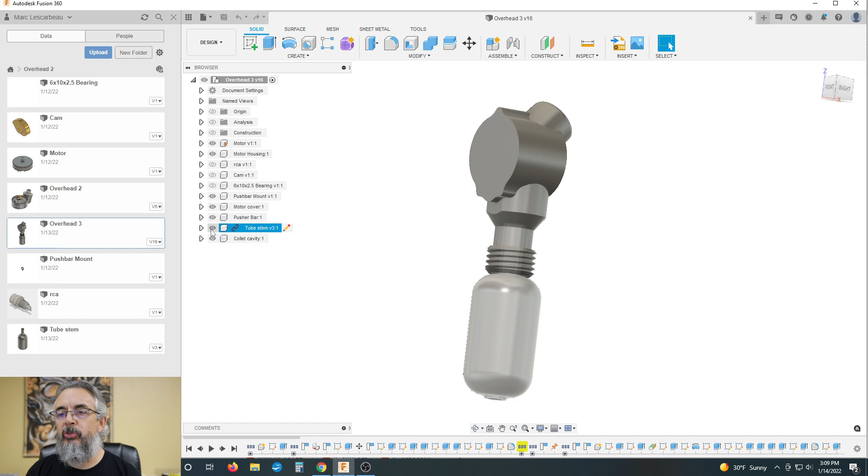Basically, there's a couple things I want to do first. I want to make a couple little changes, and that is mainly because I was downstairs looking through the tooling I already have, and I have a great 7-degree angled or tapered end mill. So I think we had built our collet taper here for 12 degrees, which would require a 6-degree tapered end mill. I already have a 7-degree, so let's go backwards and see what we can do to change that up and make life a little easier.

And what is going on here? Why is our... I haven't been in here since the last time we played, so I'm not sure. Okay, no, that's the collet there. Okay, so let's go back to this shape, which comes from this combined function. That's that. There's our sketch. Okay, this is how easy this should be, but I could be so wrong.

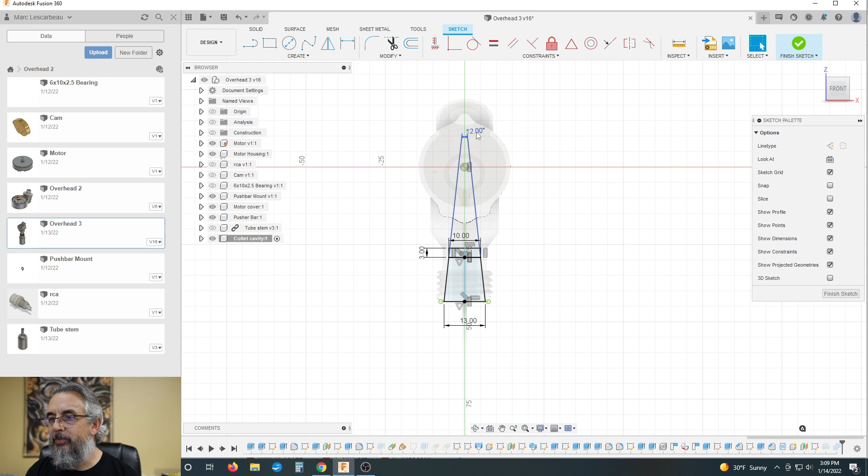Let's see if we go to 14. Okay, that just made it a little shorter. Not a big deal. And, all right. See what it looks like underneath. Pretty perfect. The only other thing I would do that I was thinking about was to recess this lip because, well, let me show you before I do it and why I'm doing it. Turn on the section analysis here.

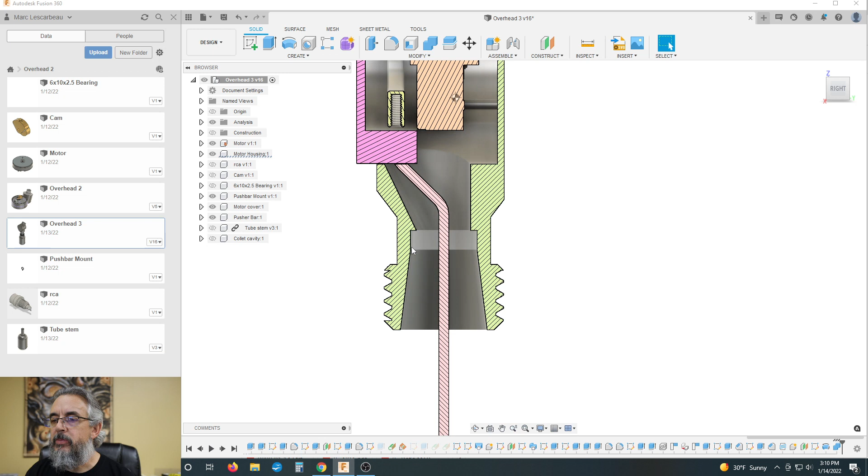Okay, so if you picture the wedge here as the collet nut that threads on the outside here, pushes the collet upwards. It pinches this taper in, which gives you the friction that holds the tube in place. And now the way I'm going to build this collet or flexure or whatever you want to call it is the very top is just going to be a solid ring all the way around with the 8mm bore and the OD that fits in here.

And then I'm going to slot from this line down either 4 slots or 6 slots. I'm not sure which yet. And there's going to be a just straight cylindrical part on the back of the collet that's going to pocket into here. But if it pockets in here and it seats against this lip, then the collet itself can't move upwards at all. And if it can't move upwards, it can't compress inwards. So I want this dimension to be a little deeper than the actual collet's going to be.

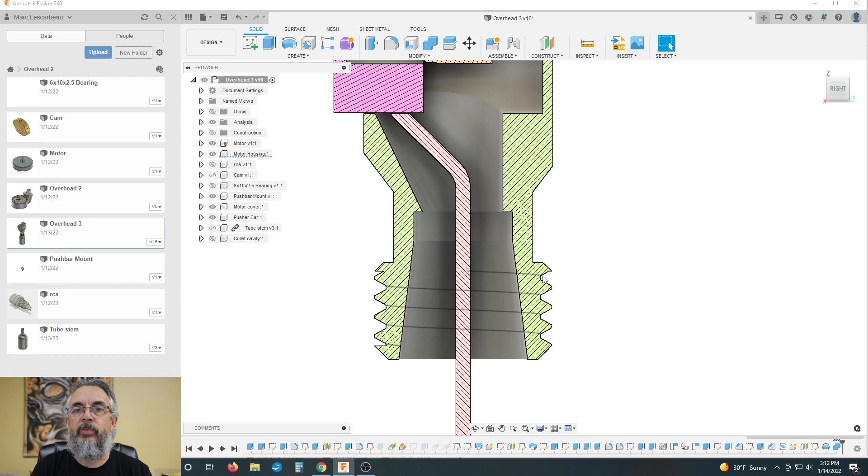And the reason I'm leaving this ring on the end is for a couple of reasons. Traditionally, when collets are made, they are slotted from one direction from the face up, and then in the opposite direction they're slotted from the rear back. So it creates this sort of zigzag all the way around the full circumference of the collet, and it gives it its springiness. I don't want to have to slot this from 2 different directions, and it would be quite a lot of work to do that. I have to create fixtures and whatnot.

So if I can find a way to produce this on my lathe where I have a solid piece that it can be held by during the slotting function and then cut off and still all be one unit, it should be more than adequate. We'll test some before we stick some out there for artists to use.

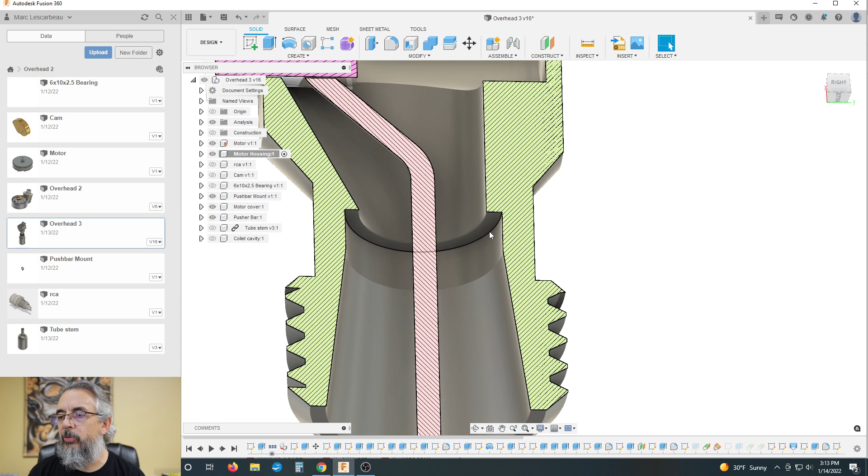But anyways, that is what I'm doing here, and this is going to be a matter of just simply grabbing this face, let's make sure we're in the motor housing. That's where we're working. I'm going to grab this face and I'm going to extrude that -1 millimeter. That's all I'm going to do is push that cut upwards. So now if I turn the collet cavity back on, which is what I'm going to use as the final shape for the collet itself, now you can see that there's room for the collet to slide up a little farther before it hits this shelf, and that will allow for compression and the holding of the tube.

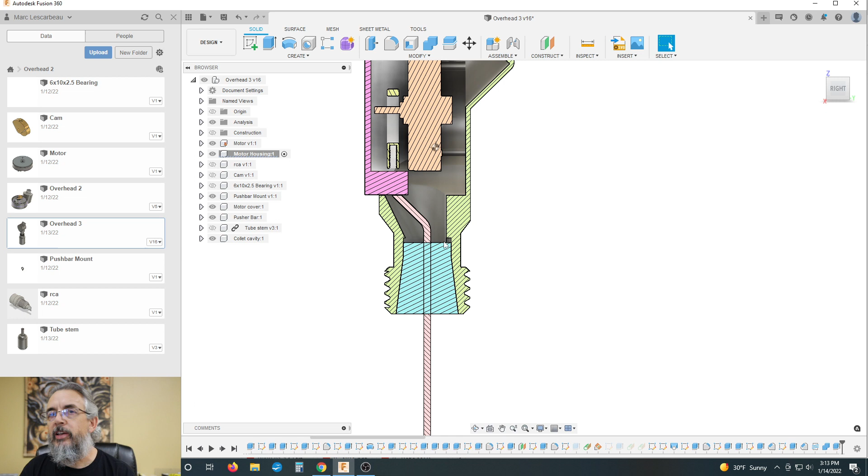So, these are just little things when you're designing something, you're going to come across all these little things, and you got to sort of stop and chase them down while you're thinking about them, or make a physical note so you get back to them. But I find when I'm doing this there's no better time than the present to just fix the problem. So heading off a future issue by doing that.

Okay, so let's do this. I'm going to, I want to keep that original. So let's just duplicate that part. A duplicate feature? Nah, just a copy paste, right? Okay. Oops. And I thought Control D was a duplicate before, but it isn't. Maybe they changed the software.

All right. You know what? We'll do this. We will save as, and we saved as a component. We're just going to call it, oh, sure, overhead 3 collet, and we're going to save it in overhead 2 file. It's going to show up over here. Okay, so now that's a totally separate product, actually.

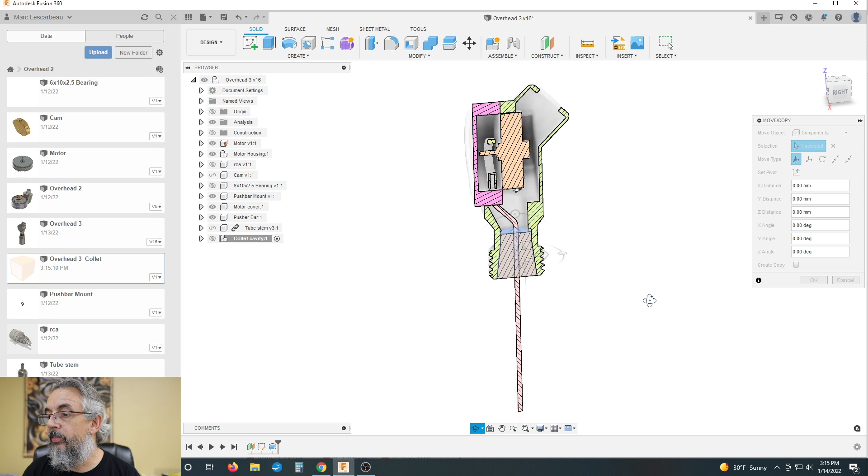So what we're going to do is we're going to insert this into here. We're going to turn off collet cavity, and let's see, that's in the exact placement we want. Perfect, done deal. Okay, so, oh, I inserted that into the collet cavity. So let's just drag that up to the top, and let's break that link. No, it's not going to let me break the link.

I get frustrated because it doesn't want to tell me why I can't break the link. Selected instance has some essential dependent instances. Breaking link parent is not supported, blah, blah, blah. Okay, I don't care. It's a separate product. Okay.

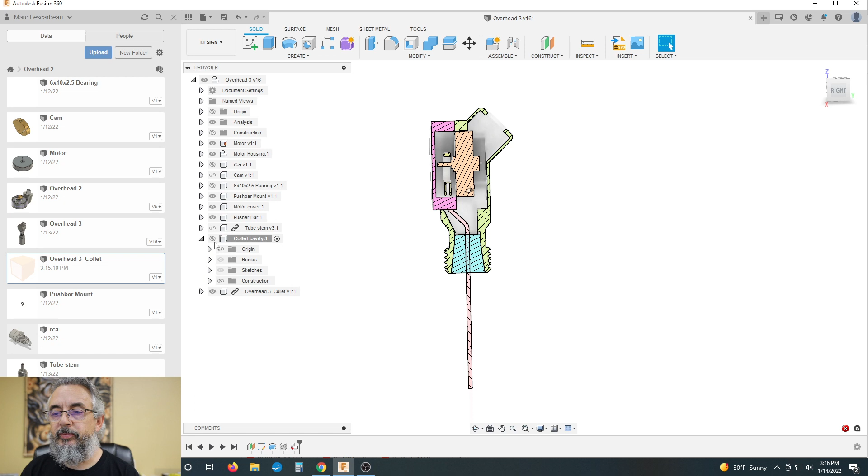Let's just isolate this. This is what our collet will look like. We'll turn our analysis off. And come on. Edit in place. Okay, yes. All right, so we're actually physically editing this part. Instead of opening it up separately, we're just going to open it up inside this project. So all we're really looking to do here, well,

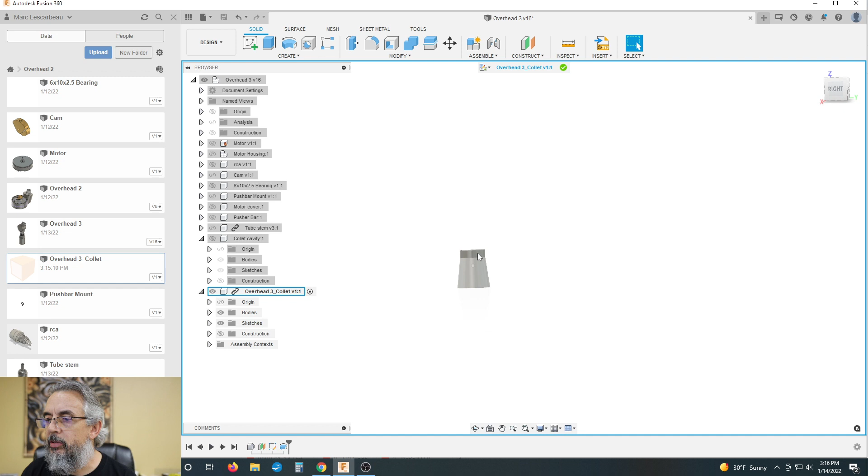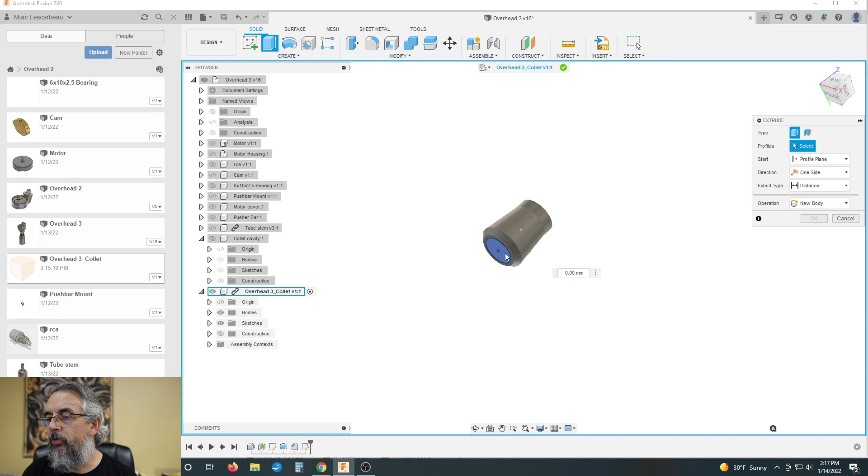a couple things. First of all, I'm going to put a chamfer on the front edge. Let's see, here, and let's do 1 millimeter, 1.5 millimeter on the front there. Then we're going to sketch on the face, and we're going to create the tube hole, which is 8 millimeters. Okay, let's finish that, and let's just extrude this all the way through.

Okay, so this is the basic shape of our pinch collet, and let's see, at the same time, let's open that sketch we just had, and let's see, rectangle, center rectangle. We're going to do a center rectangle here. I believe the thinnest slotting saw I have downstairs, I think, is a 32nd of an inch.

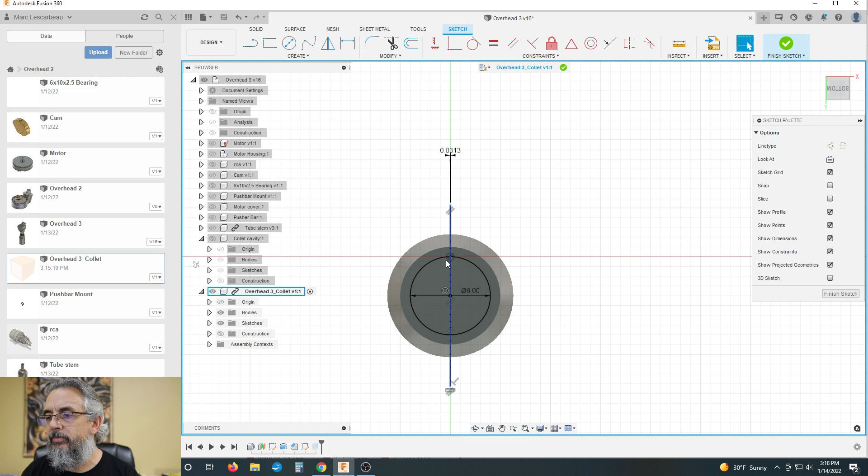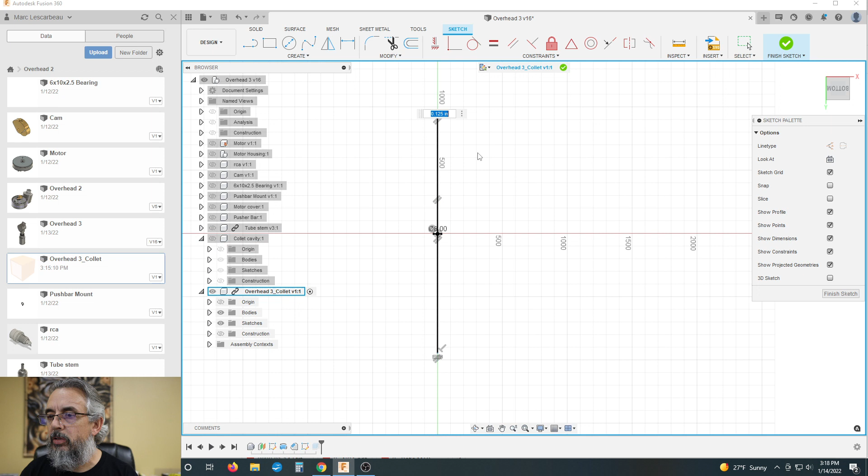So this is what's cool too, is the CAD software is smart enough where I can physically just go 1 divided by 32 IN. It knows how thick that is. No, it doesn't. Yeah, 0.03125. All right, so very, very, very thin slice there. Maybe too thin. Let's go 1/8 inch. So 0.125 inch. That's way too thick. Wow. 0.0625. I know I have a 16th inch slotting saw. Why is it making that so darn tall?

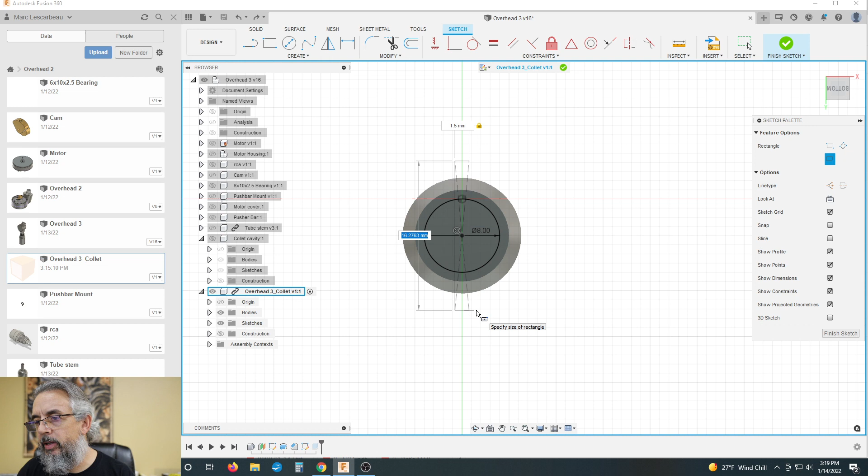All right. Let's do it in metric because it's just not registering properly there. Okay, so center rectangle again. Let's do this. We're going to go 1.5 millimeter by 16. And then we're going to do the same thing in the opposite direction. Oh, forgot to grab a center rectangle. Okay, 16 by 1.5. There we go.

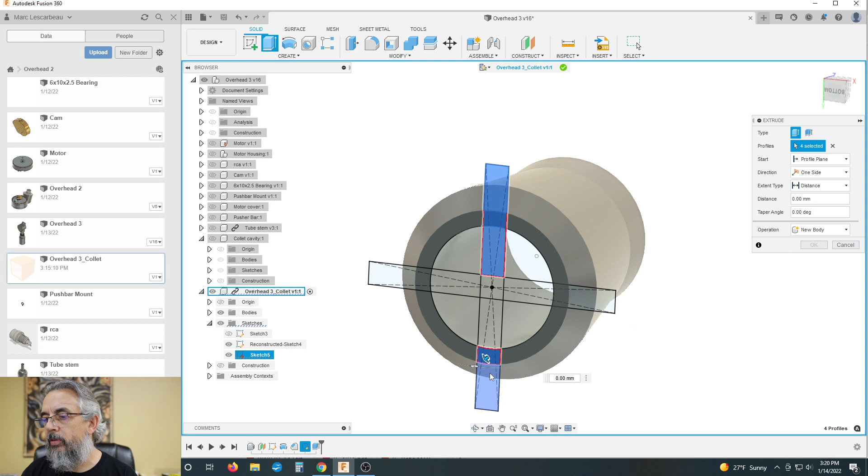Finish sketch and turn that sketch back on. We're going to do another extrusion, which is going to be everything within the rectangles. Why not? We'll grab them all just in case we modify the file later. Okay, and we're going to go to an object, back to, is it going to let me grab that scene? Nope. All right, so let's go distance.

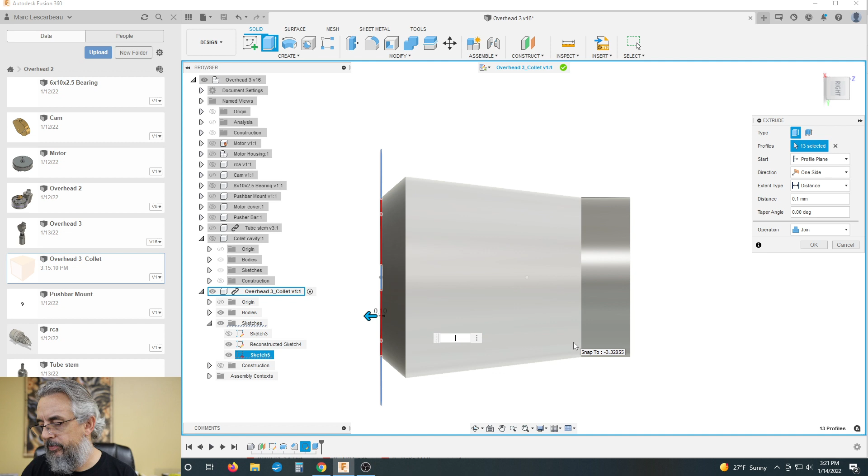Look at it from the side, and what is that? 12. Why is 12.1? I just want to get as close to this line as I can. So 2.5, good enough for government work. 2 is probably perfect, close enough. All right. So turn off that sketch now. Okay, so that's what our pinch collet will look like.

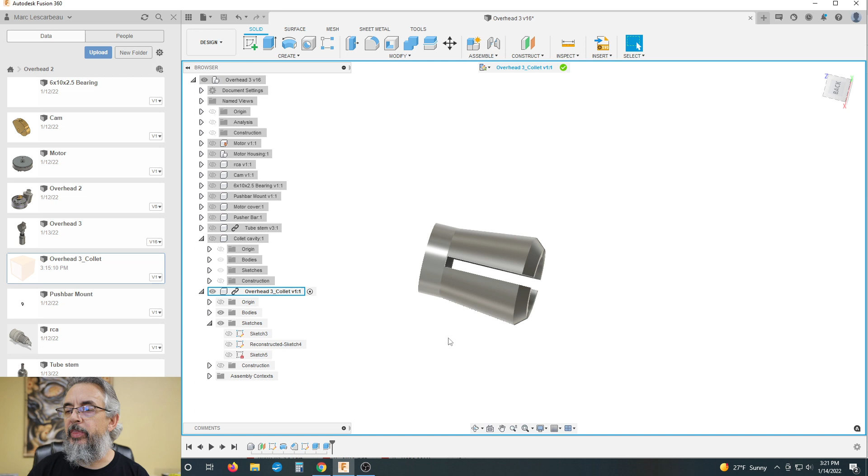And I can get that right off of the lathe all one shot because I've got radial tools. So the lathe will turn the outside shape, bore the hole all the way through and out, and then radial tool will come in and cut this slot, rotate it 90 degrees, cut the other slot, and then the cutoff tool will cut it right off of a complete part, one operation off the lathe. I will produce these originally.

I think I'm going to try them in the aluminum, see how that works, because it'll be a springier material. I may make some out of Delrin too, just to see. The Delrin won't have as much springiness, but it might conform and get a little more grip on the tube, and it may be easier to get out if one happened to get wedged in there.

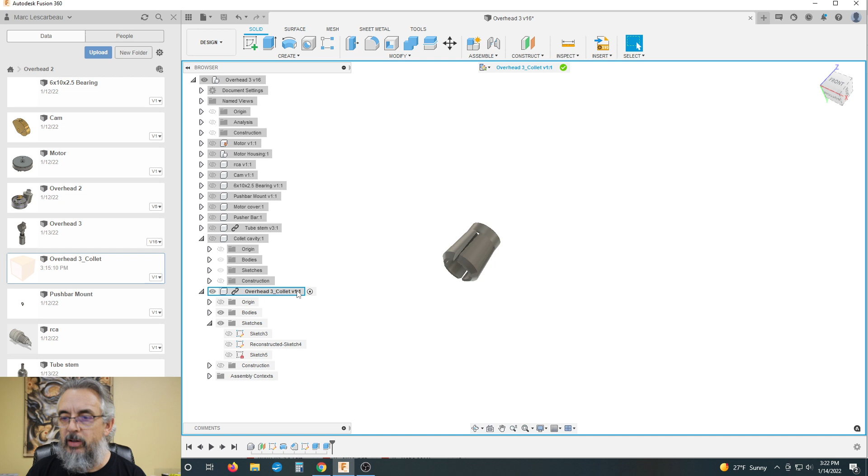So, all right, so let's exit our edit in place. There we go. And let's isolate all except for that tube. All right, there we go. Oh, where is it? That's the collet cavity. I don't want that one on. Hmm. Are we just not forward to the end? What is going on? I look stupid again. Yay, me.

All right, so what do we got here? Overhead 3 collet. Yes, we want to see that. That's on, bodies are on, sketches are off. This is the collet cavity itself, which is the blank one. Should not be showing there.

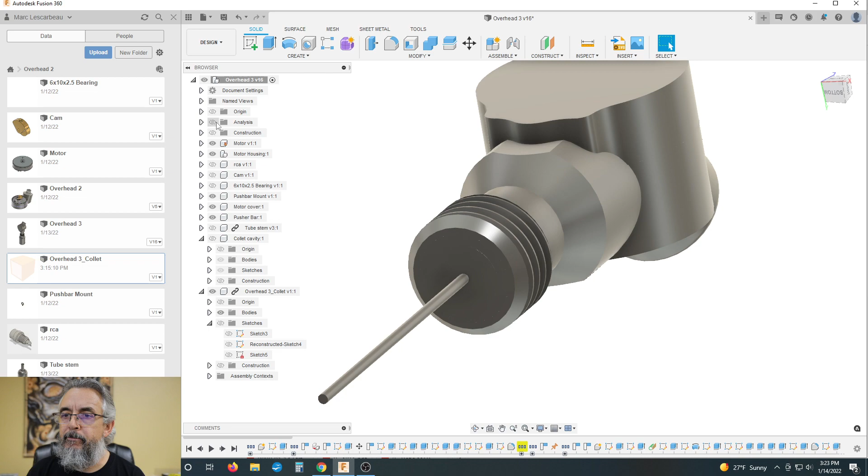I wonder, I did copy paste before. I wonder if I just didn't catch where it landed. Let's close all the components down and see if we don't have an extra one in here. Alright, if I was working in there, how many bodies are in there? Wouldn't make a difference because that's not visible. What is in here? How many bodies we got in here? Just the one? It is visible. Return.

I think this might be one of those weird little glitches where if I just close out of the control, save, okay, or save the project, I'm going to close it, I'm going to open it, and how much you want to bet it looks proper? I could be wrong. Nope. Again, I'm wrong.

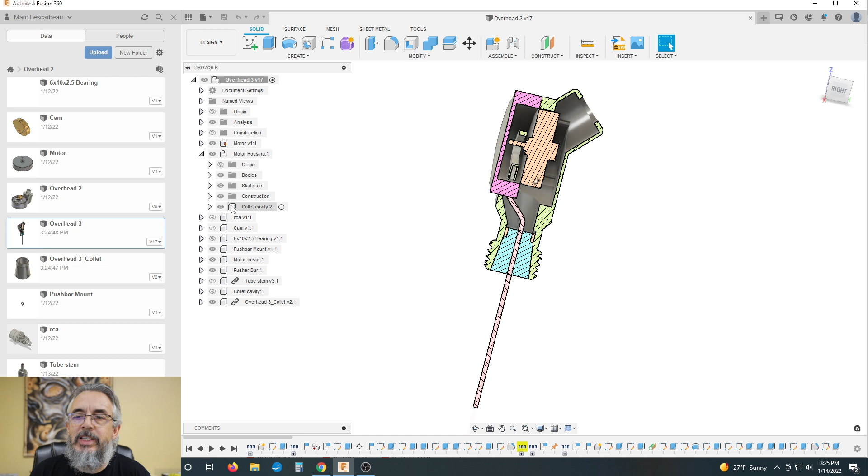Okay, so did I paste one of those into motor housing? Yep, I did. There it is. I knew it. When I hit Control V, it pasted one. I must have had motor housing highlighted. So let's just delete that out of there. There we go. All right.

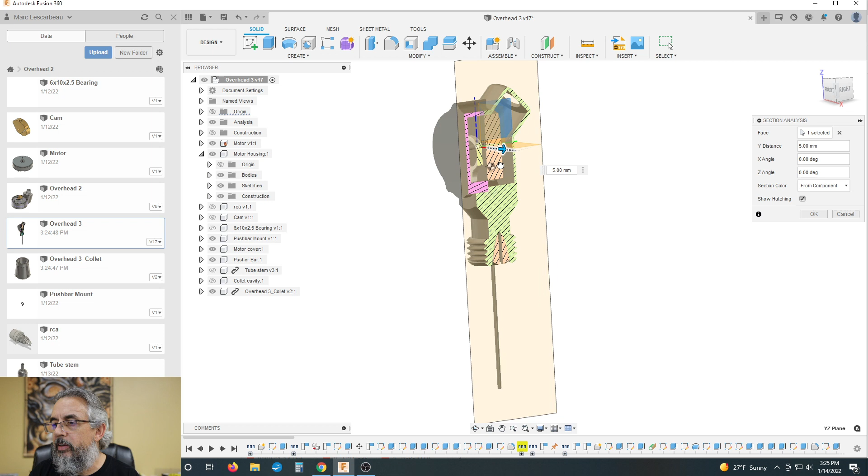So now when we're not viewing the collet cavity tool, we are viewing the collet. So now you're only seeing parts of this ring here because it's the sectional view, and it just happens to be perpendicular to the collet itself. But we can just quickly create another sectional analysis along that plane, and you can see that the collet is in fact in there. So maybe I'll go 5 millimeters. So it is in there. You can't see it because of where the slots are. All right, done deal.

And ooh, you know what I want to do? I want to go back and I want to extend the face of this collet down so that this chamfer shows outside. So when the collet nut pushes, the collet nut is going to be pushing against a V at the same time that the collet itself's going into a V, and it should get more of an even compression on the collet. So little changes as we go. So let's see.

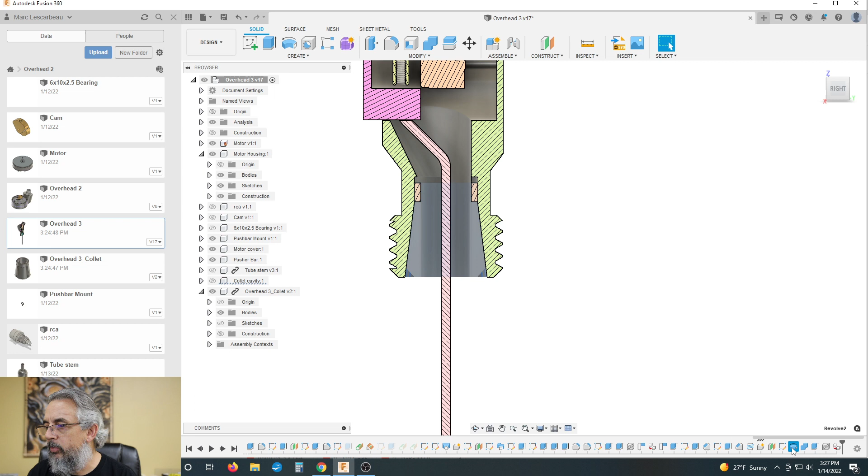Let's edit this in place again, and let's not edit that in place. Let's end edit in place. We're going to go all the way up to the end here. That was the revolve for the collet, I believe. So that's the sketch for the collet. Okay, so there's the collet sketch. And all I need to do here is, I believe I had this line coincidental, so let's take that out.

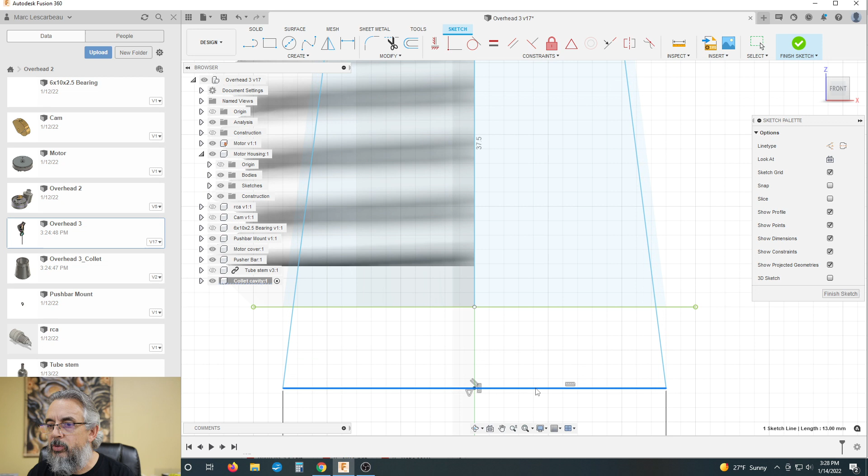Now should be able to, not that line. Let's get rid of that coincidence. Oh, how am I going to get just this one line here? There we go. That's the line. I don't want these extensions on here. I want it, there we go. Come on, pull. Okay. Well, that didn't go as planned.

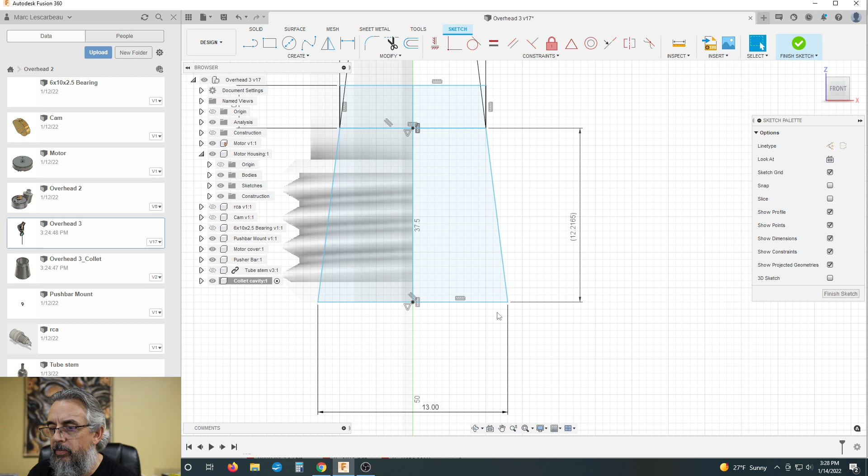Control Z. Let's extend. We'll dimension this to this, and adding this dimension will over constrain. Okay. That's because this is concentric with this line. Okay. Let's do this. Let's get rid of this line. Okay. Let's get rid of that constraint. Now let's see if we can just pull this down. No. Let's go back.

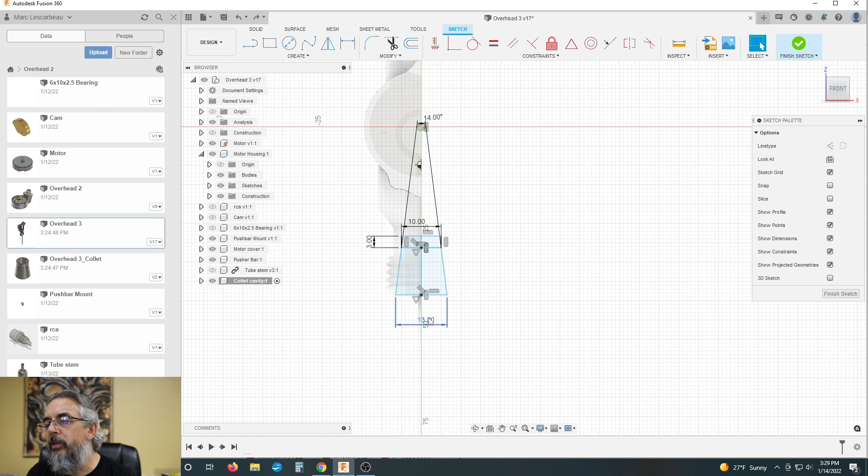What's constraining us here? We have 14 degrees coming through, 10 millimeter base, 3 millimeters there, 13. Oh, this is what's constraining us. Now I can do this. Constrain, constrain. Let's go to 14 millimeters. There we go. Finish. And cavity shouldn't have changed, but everything else that was related to it should have changed.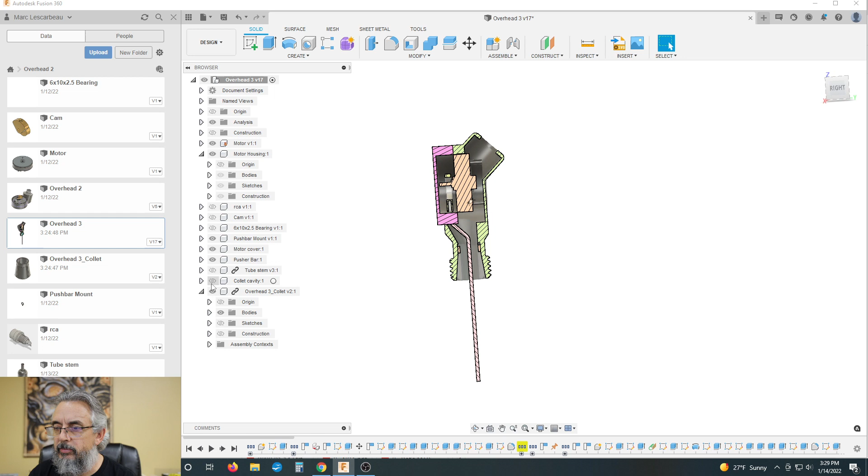So let's look at our collet now. Let's isolate that. Nope, that didn't work the way we wanted. Not a big deal. All right, let's isolate that. We are isolated. What's going on? Let's just do it the old-fashioned way. All right, analysis off. I hate this. I'm not familiar with this feature. All right, turn analysis off.

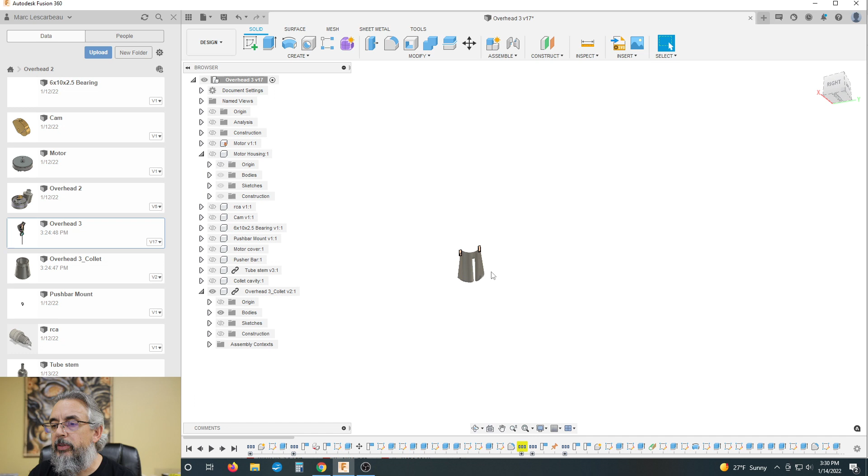Now I'll edit that in place. Why is analysis still on? And edit in place. Analysis on, analysis off. Glitchy shit. Alright, so edit in place. Let's go back to before this, before this, before this. There is no sketch. Oh, the sketch is hidden because it's linked. Alright, so

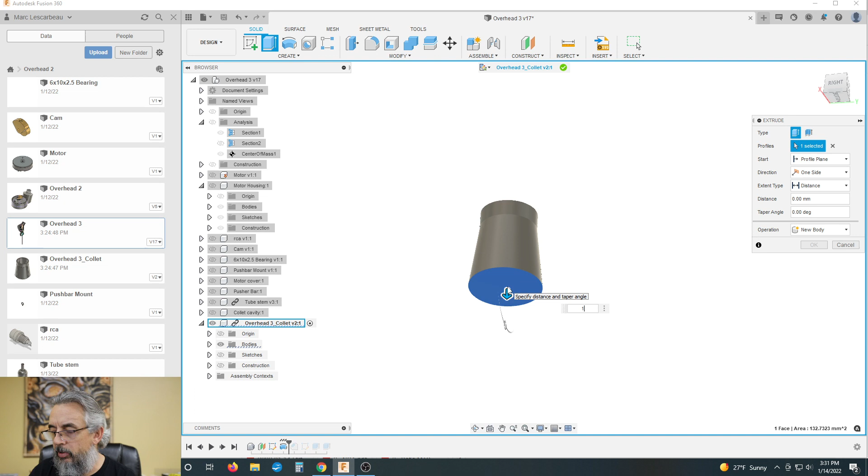revolve, chamfer, chamfer. Before the chamfer, we're going to simply add some material here, 1.5 millimeters. Okay. Now that chamfer there, 1.5, there. Should be able to do the rest fine, except for this sketch needs to be placed on this face now.

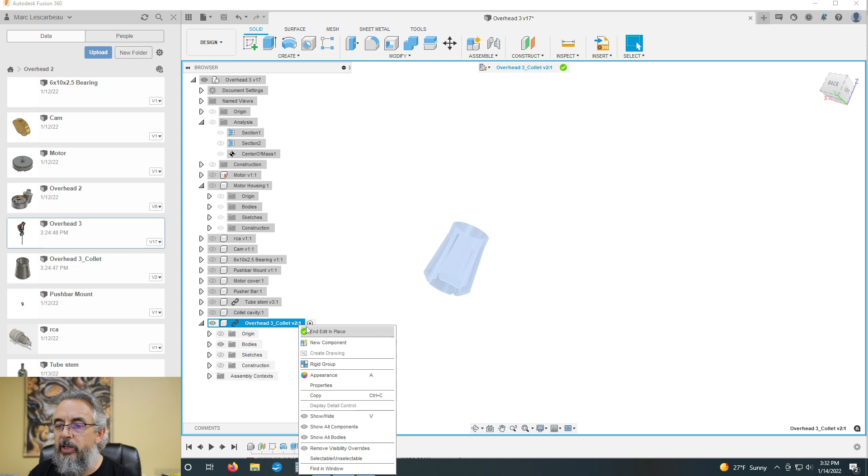Okay, now my slots are going to need to be extended 1.5 millimeters, so not a big deal. We were at 12.2, so we go to negative 13.7, and we have a deeper cut slot, and we're good to go. And we can exit out of there. And let's see, unisolate all. Why am I not getting the features I want?

Does anybody see this and I'm not seeing it? Because, remove all visibility overrides. Wow, did they just rename that all of a sudden? Okay, pusher bar, motor cover, motor mount, bearing, cam, RCA, motor housing. All right, and let's hide that grip. Oops. All right, so here's where we are.

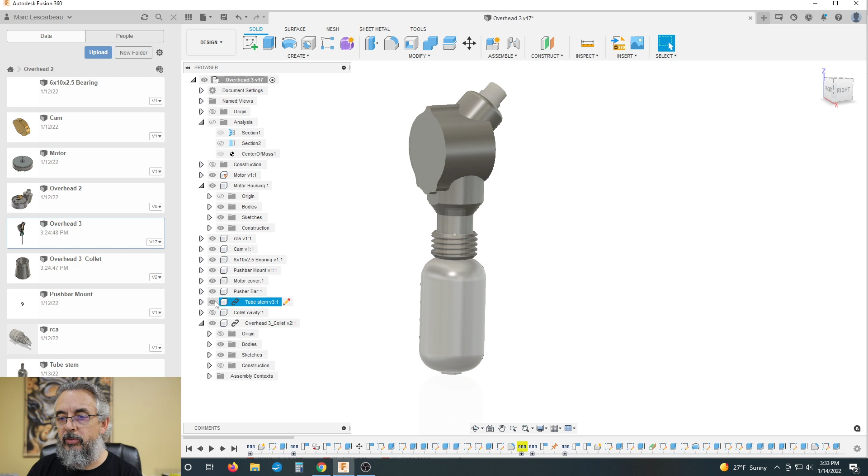Now you can see the collet's going to extend down just a little bit. And the next thing we're going to do is, I can't remember the diameter we used on this, 18 millimeter, I think. Yeah, that would be it. Okay, so now we're going to create the new product, the collet nut. Let's see, yeah, we'll just call it collet nut. That's what it is in the real world. Okay, so collet nut.

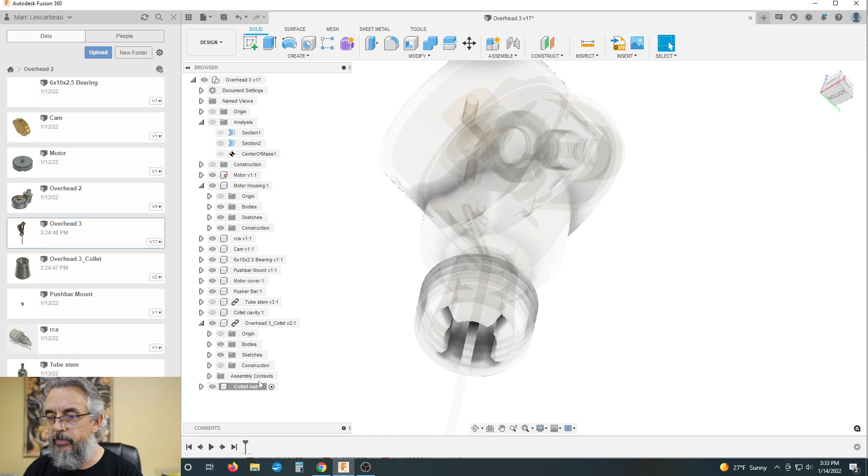We are going to create a construction offset plane. Let's turn off the collet nut, and we're going to work right on this very, very front face here. And we're going to go 1.5 millimeters forward because that's the amount of material we added to the front of the collet itself. Just confirming that the plane is down where I want it. And let's sketch on that plane.

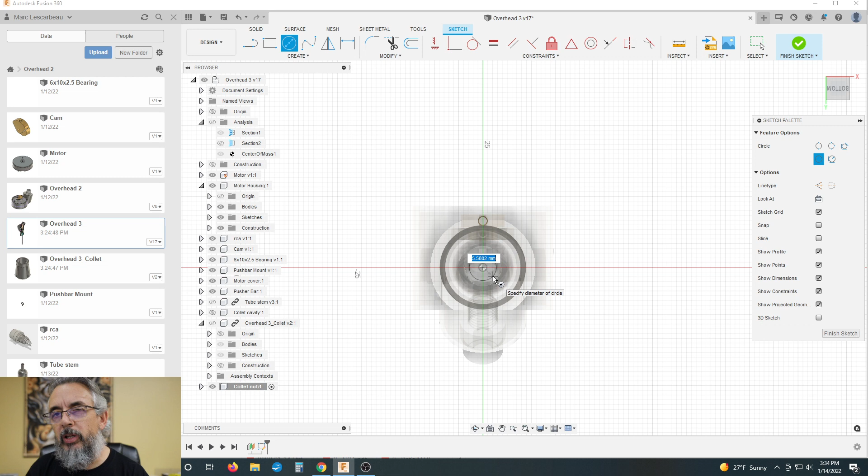All right, what do we know? We know we need 8 millimeters to come through. We'll give it a little bit of clearance here, so go 8.2 millimeter circle for clearance for the tube to go in. Then we know our thread diameter, we're going to need 18 millimeters in here. And then we're going to need some thickness around that, and extra thickness so that we can create some sort of ribs or flanges on the collet nut that you can grab comfortably with your hand, tighten and loosen.

So let's add 6 millimeters per side, 12. So we're going to go with a big fat 30 millimeter nut. We'll probably back that down a little bit, but let's go with 28 millimeters. So that's a little over an inch in diameter. That even seems big. 26. Let's go 26. And again, we'll adjust it based on what it looks like, what we think it's going to feel like, and a few other things.

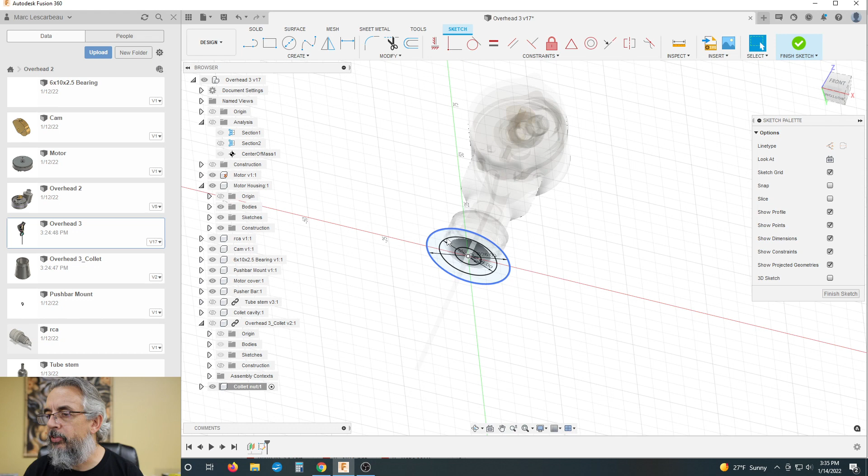Okay, so at the same time we do this, you know what? I'm going to do another sketch for that when I'm done creating the basic form. So what we're going to do here is we're going to extrude this face and this face. We'll go down a millimeter. And then we're going to turn around, make sure that sketch is on again, and from the top side here, we're going to extrude this face.

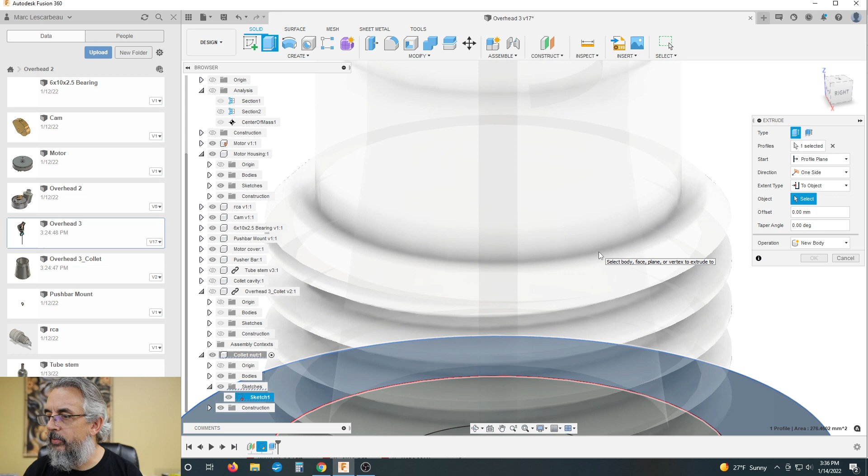Let's see what this distance is here. Let me grab that. That is 11.5. All right, so 11.5 fully seated. I'd probably just bump it to 12. Distance minus 12, because we will play around with it a little bit. All right, let's isolate just the collet nut. That's all we want to see for right now.

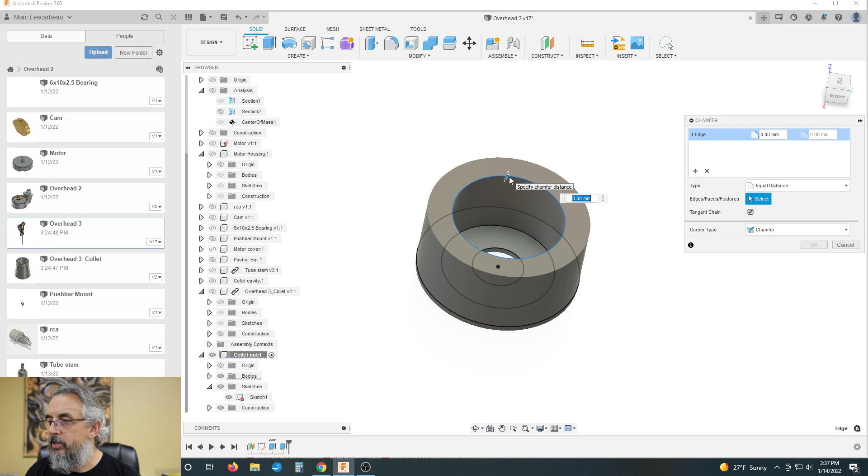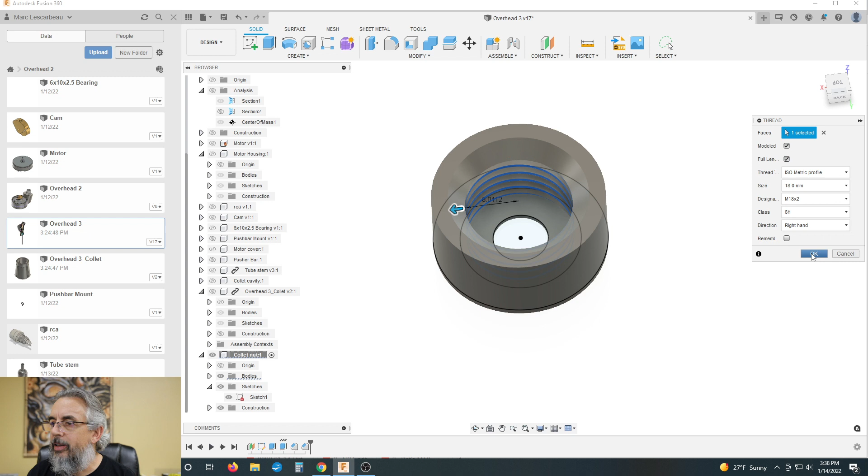And let's put a chamfer on the inside of 1.5 millimeters there. Let's see, what else? Put a very, very thin chamfer on the front here of 0.25. That really just breaks the edge. And let's put our threads inside. On this surface, I believe we went with 18 by 2 millimeter thread. Let's model them, make them look nice. Full length. I can't quite machine the full length, so we'll handle that in the machining aspect.

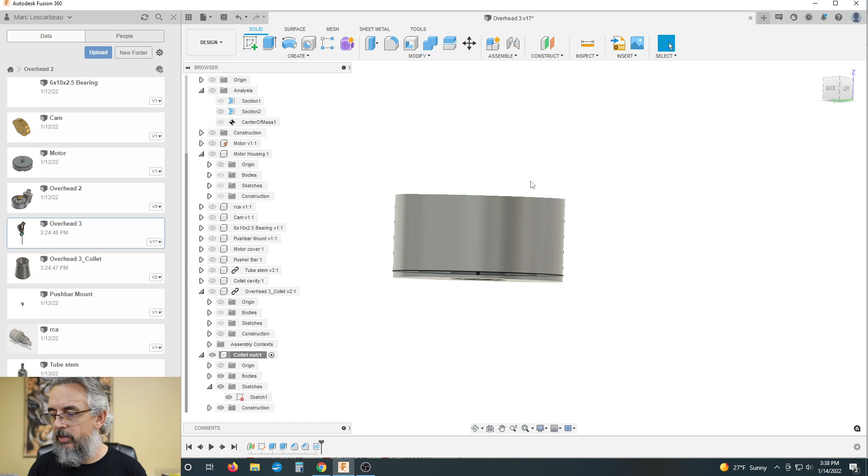Okay, so now that's a basic shape. Looks pretty good. 12 millimeters. Sometimes I need a visual reference, so I'm going to grab my digital calipers here. Quickly open that up to about 12 millimeters. And that's not even as thick as my pinky, so I'm not sure if that's going to give enough room to hold on to.

So let's back up to this one, and this extrude here, -16. Let's make that a little taller, and we may go back and modify the threads on the machine base itself to accommodate that. Now that chamfer there is looking a little deep, so let's back that off to 1. It's the threading that's giving us that appearance.

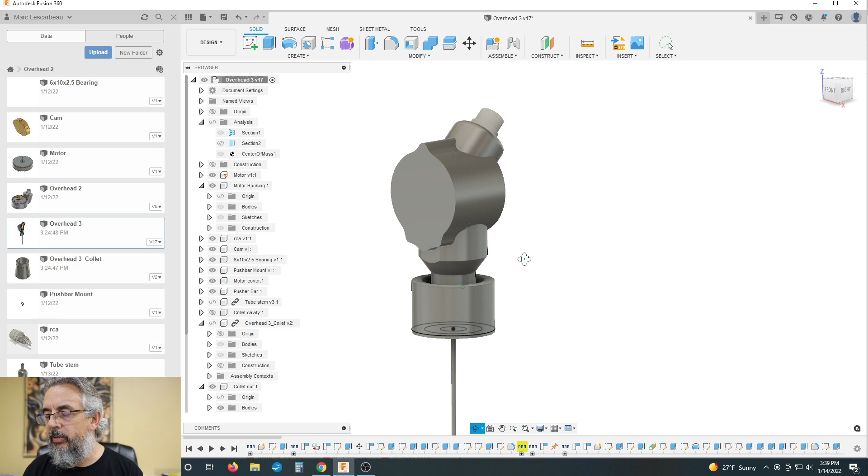All right, so quickly we will just unisolate all, activate that. Let's see what we got here. Oh, looks again like a bad Lego. Sharp edges, step on that in the middle of the night, you will not be happy. Okay, doesn't look terribly visually appealing, but we're nowhere near done. Let's turn that sketch off. Let's hide that for a moment.

This threading, I want to go back to motor housing, this whole history. Where's the thread? This extrude, this extrude. All right, so whatever I add to one, I got to take from here. So that was 7.5 on the secondary extrusion, I think. And so if we make the threads just a little longer, let's go to 12 on them. Oops. -12. And that looks a little cooler.

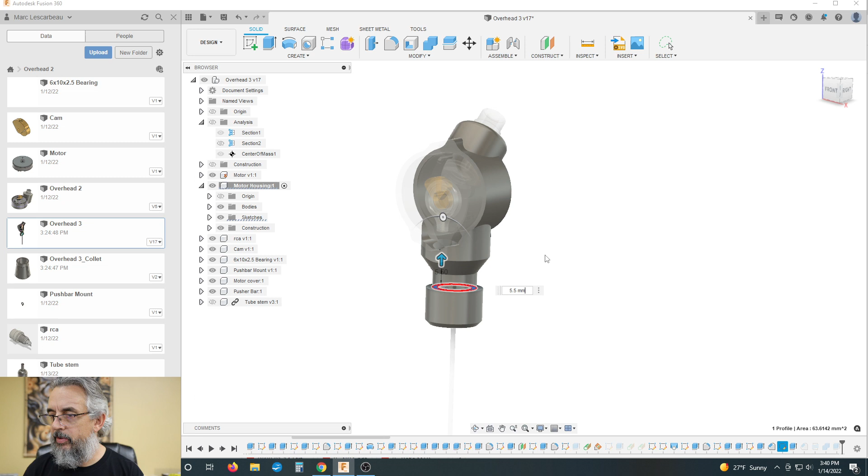Now, I want to see where this is going. 5.5. Okay, let's turn our collet nut back on and activate that. Okay, that looks a little meaty for the collet nut, but we can thin that down just a little bit. Let's go back to that and let's go down to 24.

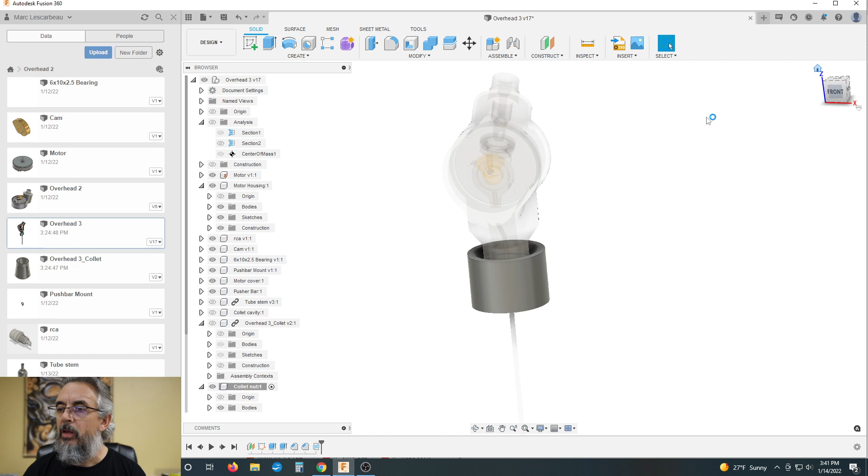Get the home view, activate, and that looks a little cleaner. Now, all right, let's put some fillets on this. This is where it starts to get a little more fun. 3 millimeters. That's kind of what we got up here. All right, so then that kind of gets into our chamfer there. We can play with that chamfer depth a little bit in the machining aspect though. Okay, so we did that.

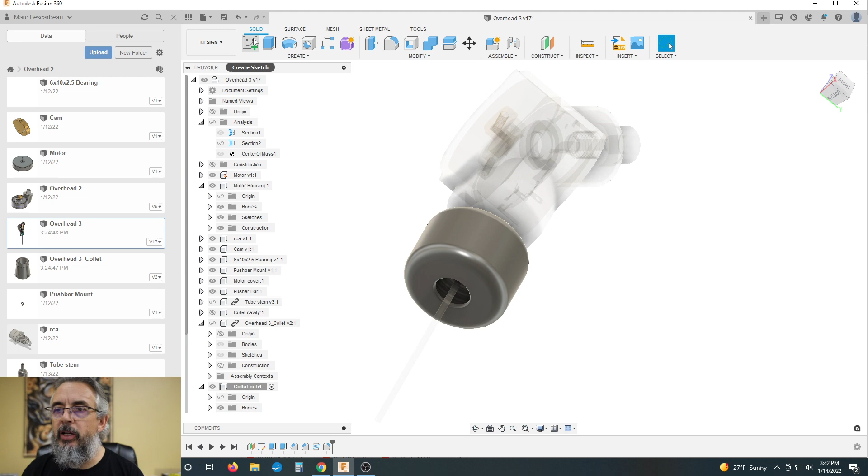Let's create a new sketch down here. And we're going to now create the reliefs, sort of like the finger grooves for the collet nut to tighten the tube. So let's do a 19 millimeter inside diameter, because I know that'll be larger than the threads and leave enough material still. So that'll be good. And create another circle straight up off the top here.

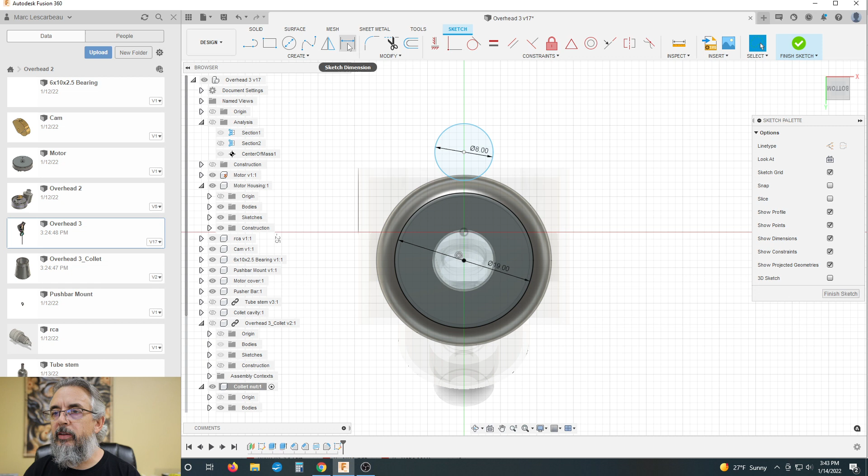Let's see, how big of a relief do I want here? Generally, I've been doing, well, let's do 8mm relief. Okay. And we're going to make this relief tangent to that 19mm line we just created. And we're going to create a circular pattern of this item around this center. We're going to do 5 of them because I almost always do 5s when I do relief cuts.

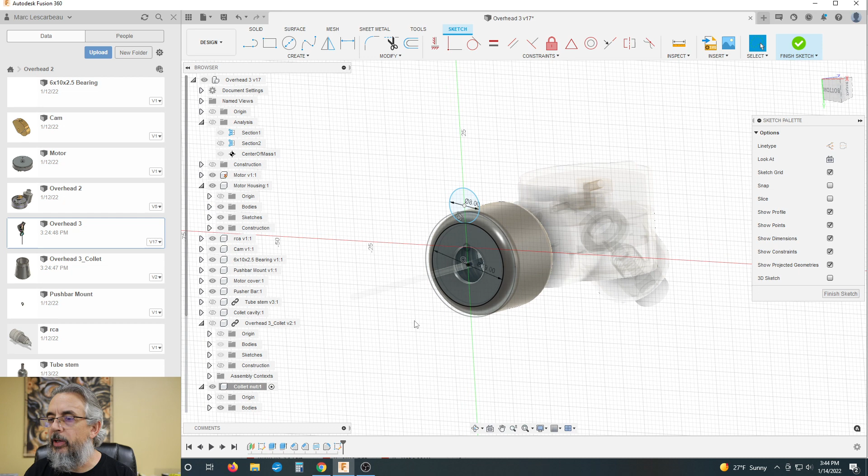Oops, actually, let's back out of that because what was this diameter again? Come on, Marc. 24. Okay, so let's go back to this. I do 24, and I'm going to trim this outside circle, this inside line, and I'm going to use the drawing fillet to do that. Let's go 3mm on there, 3mm on there. Call that good, and now we're going to create our circular pattern.

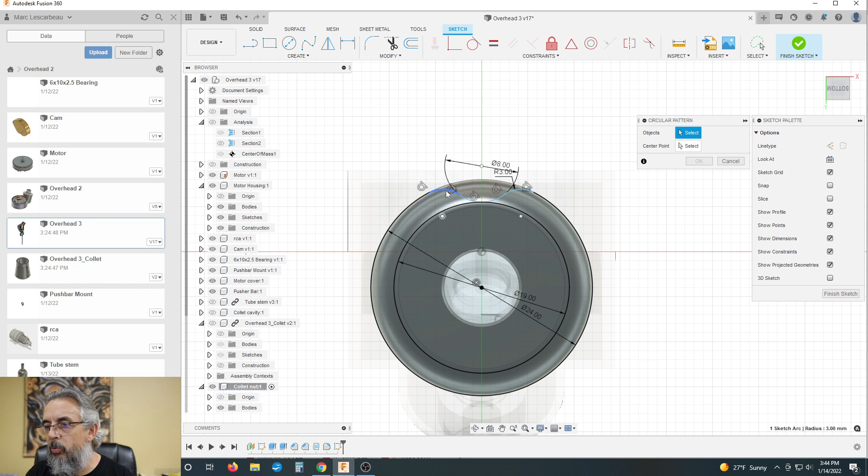And what we're going to do is take this line, and this line. We are going to revolve that around that center, 5 total units, and click OK. All right, so now I'm going to create one more circle, which is just going to be, well, let's go 30mm for fun. Finish sketch, and this is where things get kind of cool. Turn sketches, I want that sketch off, the sketch on.

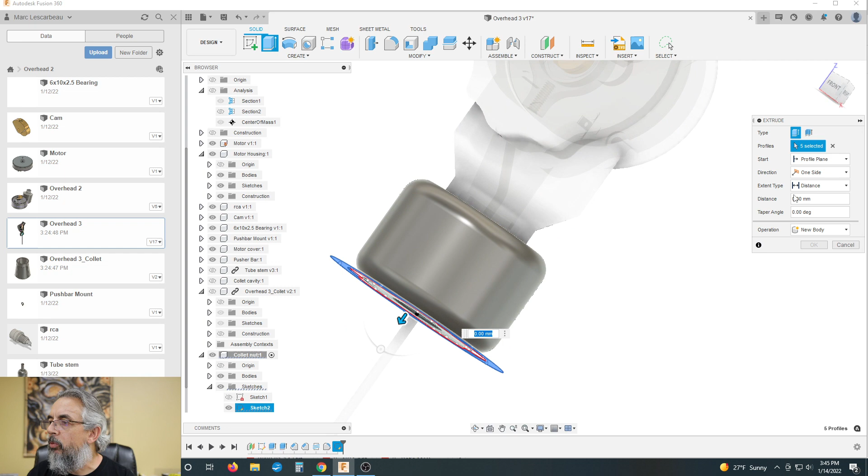We're going to extrude the shape that we just created. We're going to extrude the distance to object up until that line. No? All right. Let's just pull it up. Get it up past the whole nut. Bam. All right. That looks kind of cool. I'm not sure I like the way it cuts down into the chamfer, so let's change that chamfer to 0.25 and just see if that makes a difference.

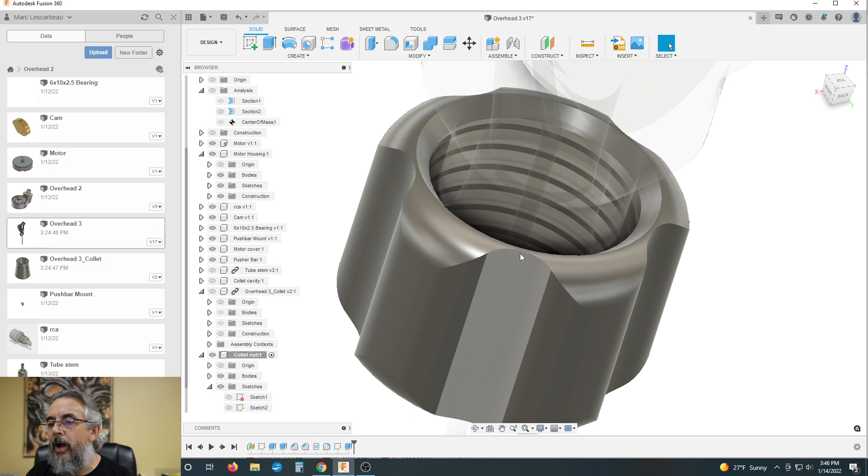There we go. Now these reliefs don't quite get into that chamfer line, and it looks pretty decent. I'm relatively happy with that. Simple, functional, a lot of curved edges, not a lot of sharp edges, so it doesn't want to dig into the fingers while you're tightening it. Might be a little big on the diameter, and the only reason I worry about that is because people like to over tighten things. But honestly, I think that should be okay. After I make some and play with them, I can go back and make adjustments.

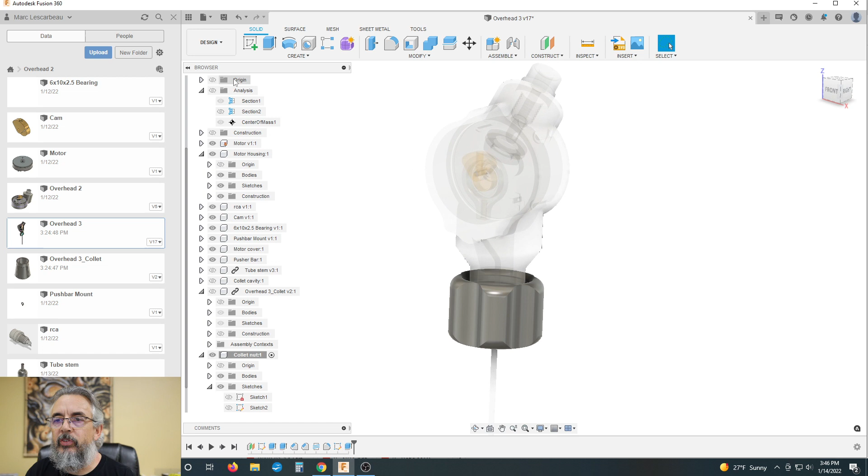So, all right, there we go. What did we do today? Let's turn everything on. Let's look at it from the front. We have a front analysis. No, we didn't want to keep that one. This is going to be our side view analysis. Let's do one from the front. Sectional analysis from this face. Okay.

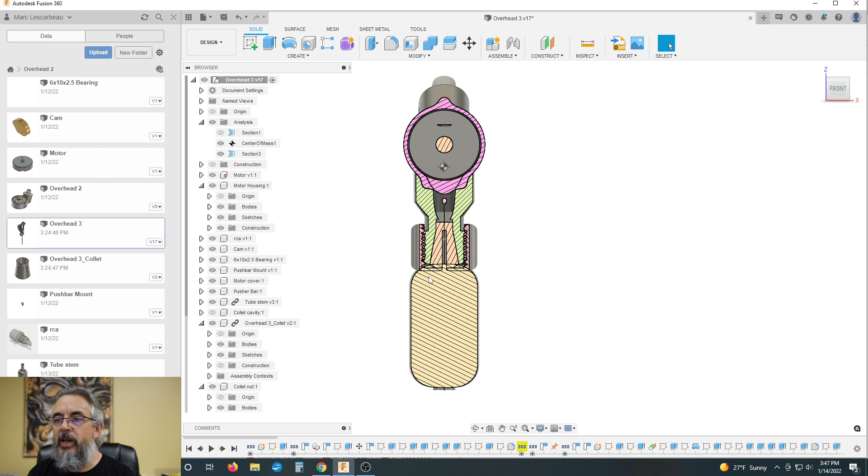All right, so our tube's up too high right now. Again, little things we can adjust. We may end up shortening the body to accommodate that. We don't want this to be too overly long entirely, but guess what? It looks good because our collet nut presses against our, let me turn off the tube. Okay, so you can see our collet nut, represented by the pink here, will press against the face of the collet tube. This is something I didn't either. I've got to put this angle into the bottom here, and then it will compress inwards while it pushes upwards. So I'll go back and do that here.

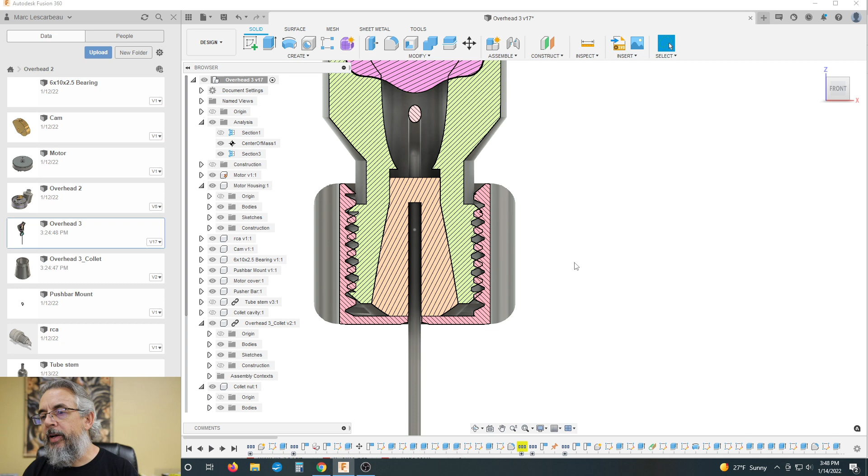Well, you can see what's going on. The tube comes up through the center of the collet. As you tighten the collet nut, it pushes the collet deeper into the wedge. It compresses against the tube, and that's what holds it in place. Easy enough. The side view should be very similar, except you can't really see the collet because the slices come right through that very same place.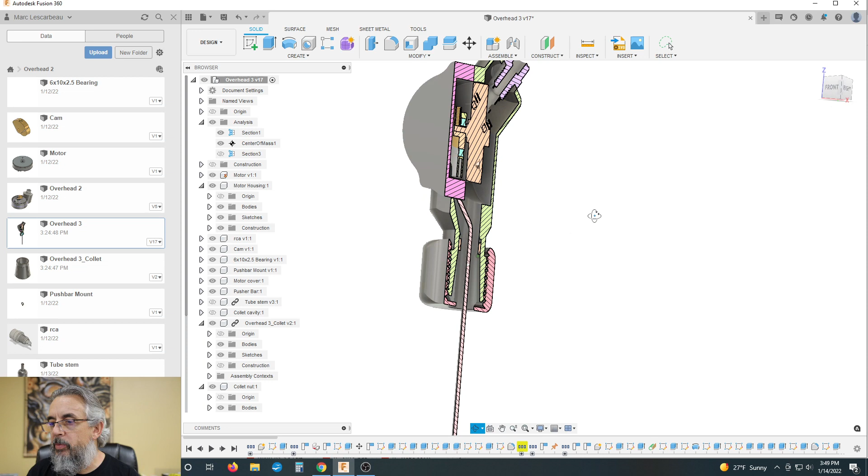So, all right. I hope this one wasn't too terribly long, but we made a little more progress. I think the very next one we do will be going through and, wait 1 second. This is why you look at things from different angles. All right, now I have enough material there, but honestly, I may, yeah, let's do it. Why not? Not the collet. Let's get to the collet nut. Edit that.

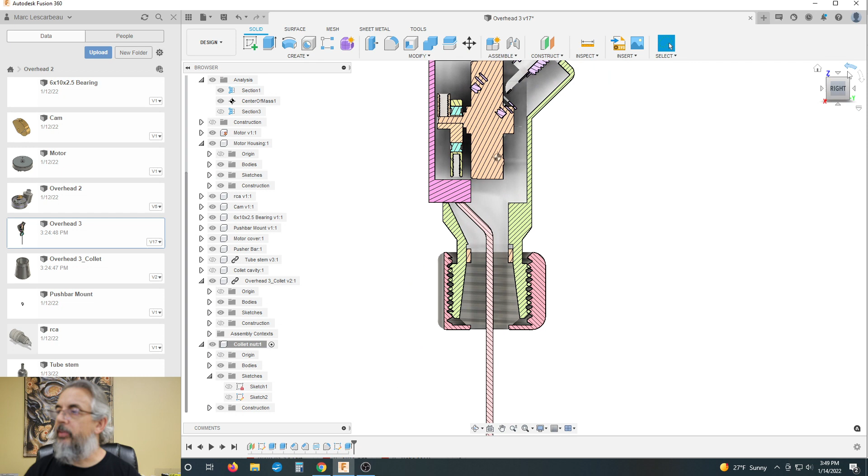This is the diagram here, the drawing we did here. This one here is 19. Let's go 19.5. Add just a tiny bit more meat to that. And finish. And right side. And just like that, we thicken this up. Not much, 1/4 millimeter on each side, but makes me feel a little bit better about it.

On the thin sides where the recesses go, it gets thinner. The cuts get closer to the threads, but where it's larger, it's plenty meaty. So, okay, let's measure this angle while we're in here. Why not? I know I get close to saying, oh, I'm done, but then I go do something else. So what's that angle? It's not going to give me that angle.

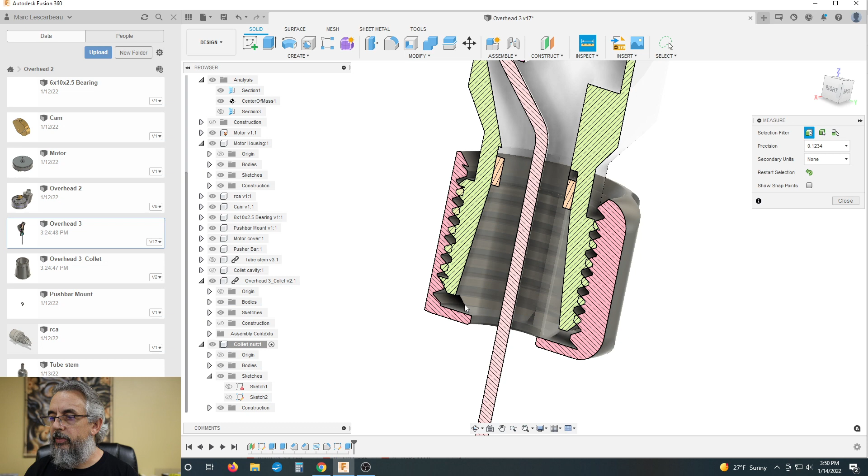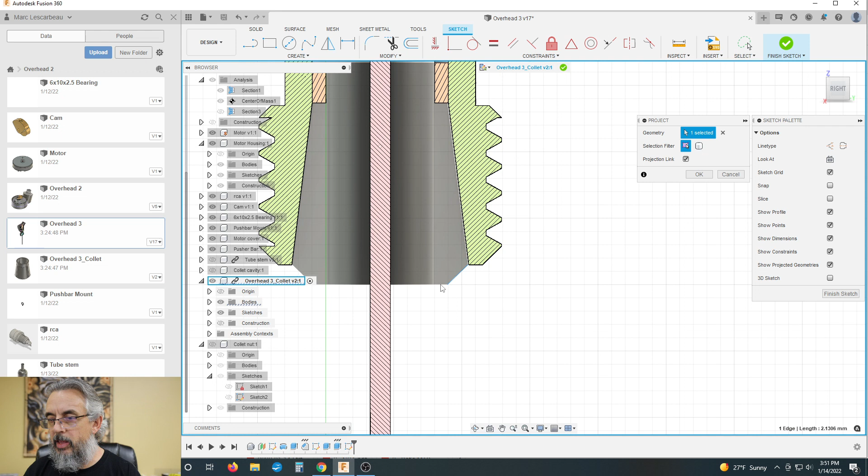Okay, so let's go into the edit in place on the collet. Let's hide the collet nut, and I just simply want to measure the angle between this face and this face. Is it going to give me an angle? No, it's not. Close, easy enough. We shall sketch on this plane, and quickly project that line and this line, and then we will dimension, or let's do this.

Let's extend. Not going to let me extend that line. Okay, fine. We'll do the math backwards. Okay, so we're going to measure between this and, come on, this. No, I want, grab it. I want you to give me a dimension between that line there and this line. Okay, fine. Gonna let me measure it anyways?

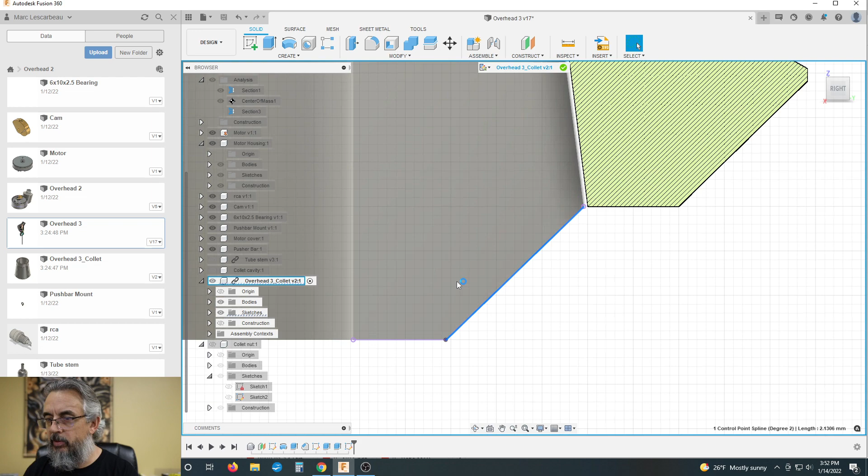All right, let's break link. You're not gonna let me break link? Did we project that one to start with? Let's hide the bodies. All right, I can see 2 lines, right? I'm not crazy there. Dimension this line. You know what, let's just draw another line. It doesn't want to recognize that line? Fine. We won't. 135 degrees. Yeah, that's what I thought it was, but I just wanted to be sure. Okay.

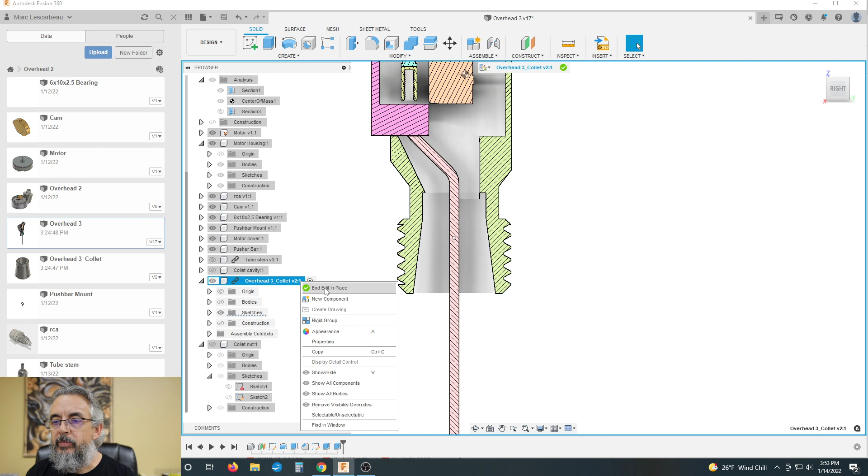Finish sketch. Let's just delete that sketch. Okay, so 45 degrees is what that is. So that makes things just a little bit easier. Edit that, get out of that. Back into the collet nut. We're working on the collet nut. Let's isolate it so nothing else is around. And we're going to back this all the way up to here. In fact, we're going to make this 2.5 millimeters and extend up to this.

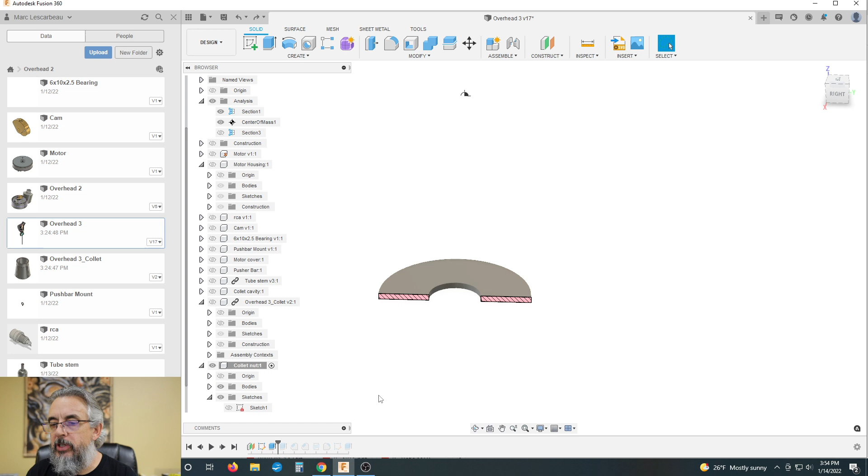Nope. Control Z, Control Z. There we go. Add this in. I want to extend this up 1.5. Then, what was the outside diameter of our collet? Oh, I can just do it on the collet cavity. Hide the collet nut and inspect this diameter, which is 13 millimeters. Okay, close, turn the collet nut back on because that's what we're working on. Hide the collet cavity.

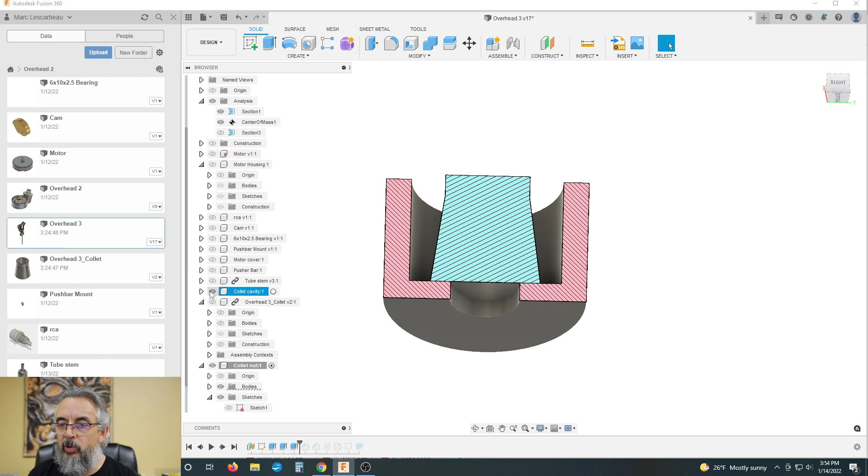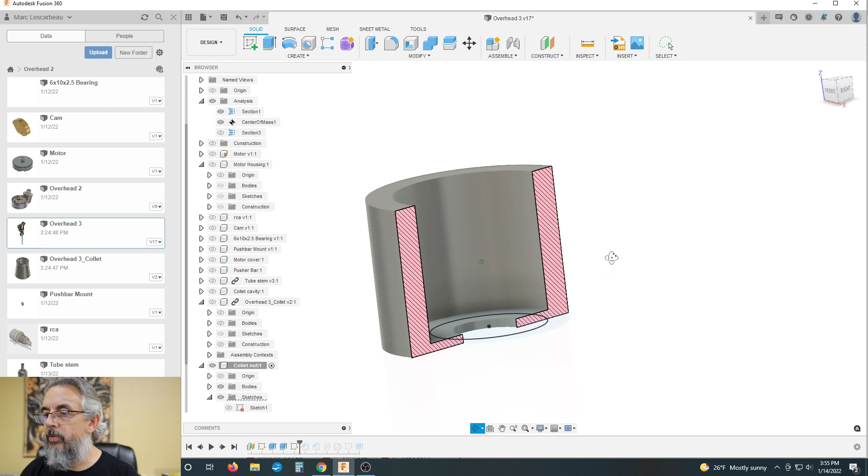Create a sketch on. Nope. It's not what I want. Finish sketch. Delete sketch. Delete that extrude. Again, it's a never-ending battle. Okay, so what I want to do now is on this interior, I want to create that 13 millimeter circle from the center out. Okay, and then I want to extend this up 1.5. Then I believe I want to put a chamfer of 1.5 on that.

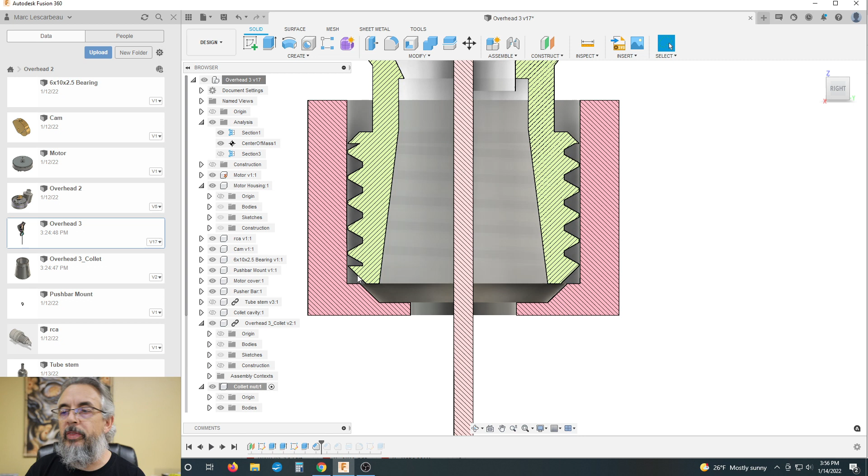Now let's see if this did what I thought it was going to do. Unisolate all and close. The heights are off just a little bit, but you can see where the chamfer I just put in the face of the nut now is going to connect really well with the face of the collet. So I don't have to do anything actually. As the nut tightens up, it'll just move up that 1.5 millimeters before it makes contact. Then it will slide a little higher up the machine body, and there will be less of a gap there.

All right, let's activate that. That's where we're at. And again, I dragged it out way too long, but it takes me a lot longer to do these things while I'm walking you guys through it. You can see by now that my ideas and plans change quite fluidly, where I have an idea and I start down that road and it doesn't work. Or it will work, but I don't want to go there because it's going to overcomplicate things.

And the truth is I'm really just spitballing this. Most machines I'm designing, I spend weeks and weeks on just the concepts and basic designs, and then more weeks during the final detailing, and then the prototyping and all of that fun stuff. But we're moving along pretty good here.